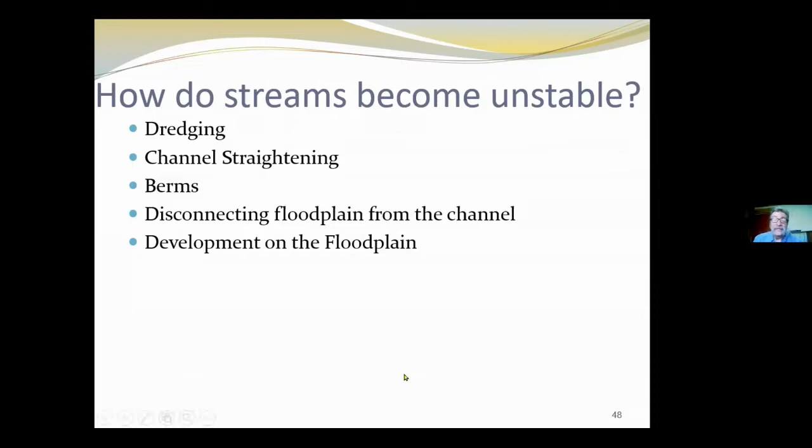So really, how do streams become unstable? A lot of it has to do with our activities. When we respond to excess sediment moving through a system, we may engage in dredging that may or may not leave the stream in better or worse condition, due to some development in the area. We might try to straighten a channel, build berms which disconnect that stream from its floodplains, or any other ways we disconnect floodplains from the channel will have an impact on that stream. Development in that floodplain is just some of the things we want to start to address.

We can't talk about streams and sediment movement without at least touching on dredging. As I mentioned, streams evolve over centuries to reflect the flow patterns in that watershed that Jeff talked about. That typical stable pattern includes a uniform slope, a slope to the stream that develops to reflect its valley and the area it's cutting through.

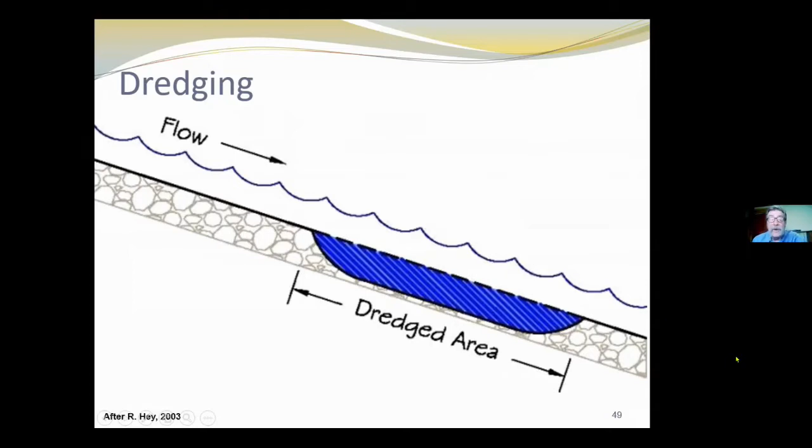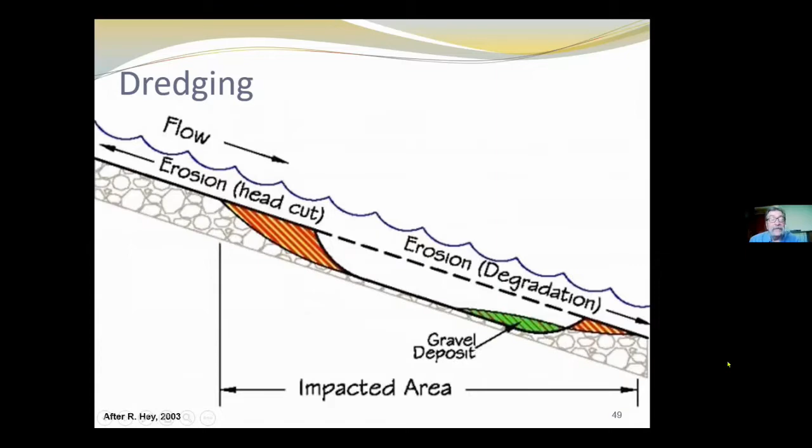So if we come in here and we have excess gravel and we remove gravel below that uniform slope, the stream's going to respond somehow to fill in that hole. What happens is that stream moves upstream and starts to grab bed load. It grabs material from the bed and banks of that stream and attempts to deposit that gravel to fill in that hole, and over time it'll actually return to that uniform slope.

The other thing we can expect to happen is that this material was bed load that was mobile to begin with. So basically, we're putting material that was mobile to start with onto a bank, expecting it to stay there. Then when the next high flow comes along, and that shear stress is even going to be higher than before, it's going to remobilize that material, and we're going to see some consequences as a result.

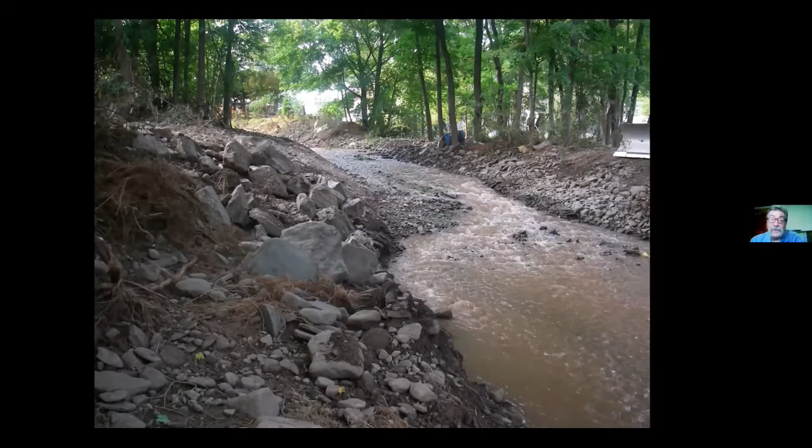Here's an example of an area where, again, they just removed some material from the stream for whatever reason. They piled it up on the banks, again eliminating access to the floodplains. They oversteepened an area, and if you look right here, it's oversteepened, and they flattened it out here. So what's happening? We've got that steep riffle and a channel that's a little bit too wide.

So now we're going to see gravel deposition, even within the short time that this was excavated. And we're starting to see that erosion hitting upstream, where that stream is looking to grab that material, take it out of the channel and the banks, and deposit it to fill the hole we just left in the stream. We need to be aware of that process, because there are unintended consequences to some of our activities, and that's what we're aimed at.

So really, does dredging help flooding? Here's an example where some folks did some engineering, and that purple line is the original bottom of the stream. They theoretically dredged that stream 3 feet deeper to see if they could get more flow through that channel without engaging the floodplain. But when you look at the elevation difference in that floodplain before and after dredging, it's hardly anything at all. So we're really not protecting our floodplains by dredging streams.

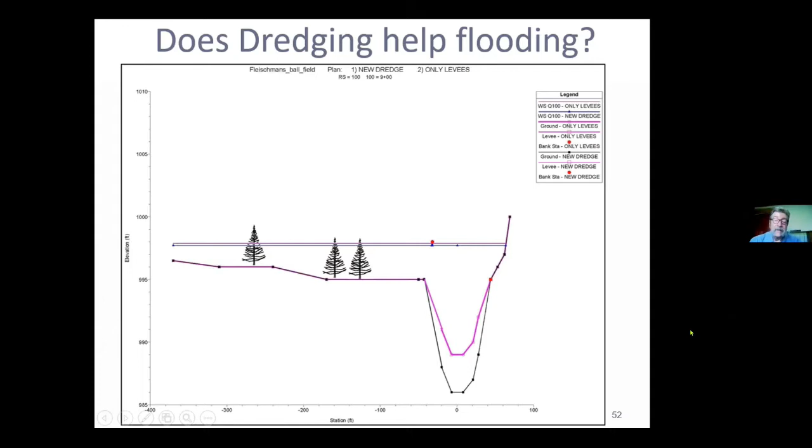So, how would you approach it? Well, here's a typical stream, and we can see here's a bankfull elevation. Let me clarify what we mean by bankfull elevation. Bankfull is that elevation in the water flow in that channel that starts to mobilize the bed load material and starts to create the shape of that stream.

At that point, when we hit that flow at bankfull, the stream starts to evolve, showing features that result from the deposition of material being moved at bankfull. So when we disconnect the stream from bankfull by making it too deep, we eliminate access to floodplains, and floodplains act like a pressure relief valve. When that shear stress gets so high that it starts to rip and tear at the banks and dig up the bed of the stream, it's able to dissipate its energy over a broad area of floodplain. That floodplain is really critical to how that stream remains stable.

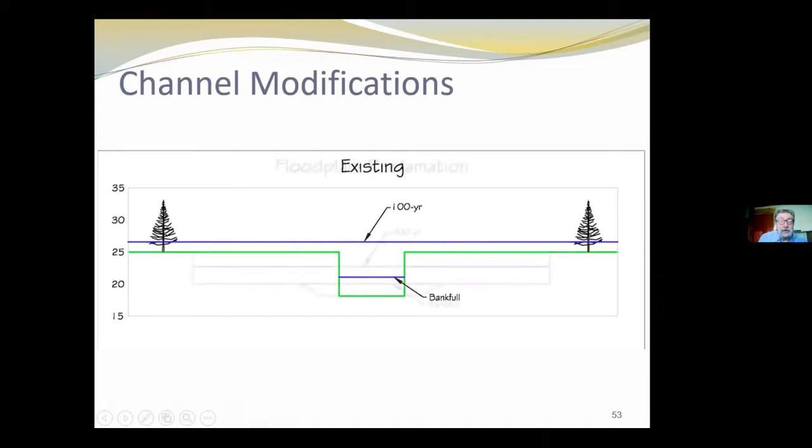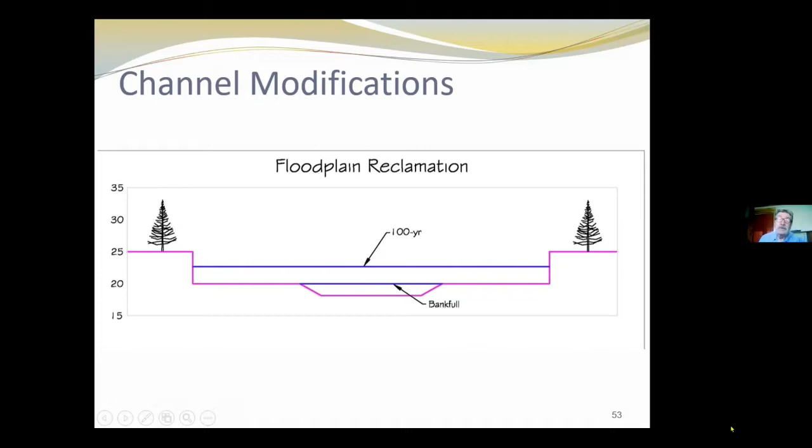So if we go in there and decide we don't want so much flooding, we've got that 100-year floodplain out there, we've got bankfull, and we just dig that stream a little deeper, we didn't really budge that 100-year floodplain at all. Rather, what we're proposing is that if you have a situation where you're disconnected from the floodplain and you have flooding issues, if we were to go in there and create a channel that reflects the bankfull condition, the stable shear stress, and the floodplain that's needed, we recreate that floodplain and can significantly reduce the amount of flooding in developed areas. By recreating that whole stable stream system, we can start to address the long-term stability of a stream channel.

When we go to straighten a channel, think about the slope, the steepness. When you have a long meandering stream channel that goes from point A to point B, you have a long distance for that stream to drop out some of that power, some of that energy, some of that shear stress. If we reduce that distance, we shorten the distance the stream needs to travel, so it picks up energy, and by shortening that distance we also increase the slope. So we have a steeper slope, increased velocity, and as a result, more stream bank and stream bed erosion.

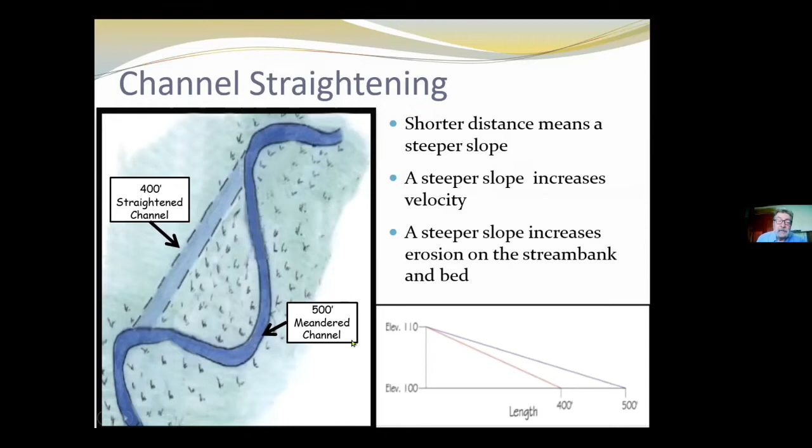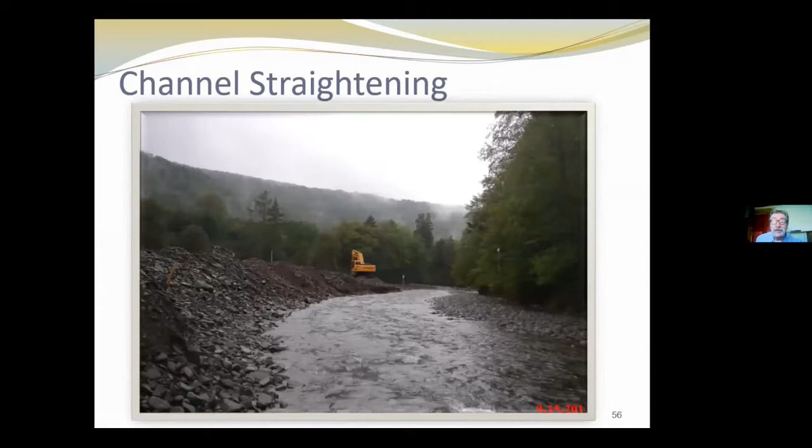Here's a case example where, for whatever reason, over to the left side of the stream looking downstream, we can see there were some impacts—maybe there was a road there or whatever. So folks decided they were going to straighten that stream, and as usual, they dredged it out. They created a berm so that the stream could no longer engage its floodplain. Within a very short time, that stream started to meander back to where it wanted to be, taking that straightness out of the stream. It wanted to return to that stable situation.

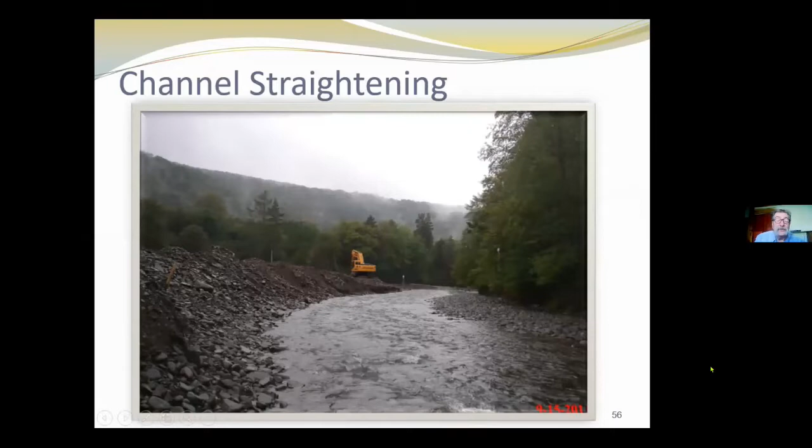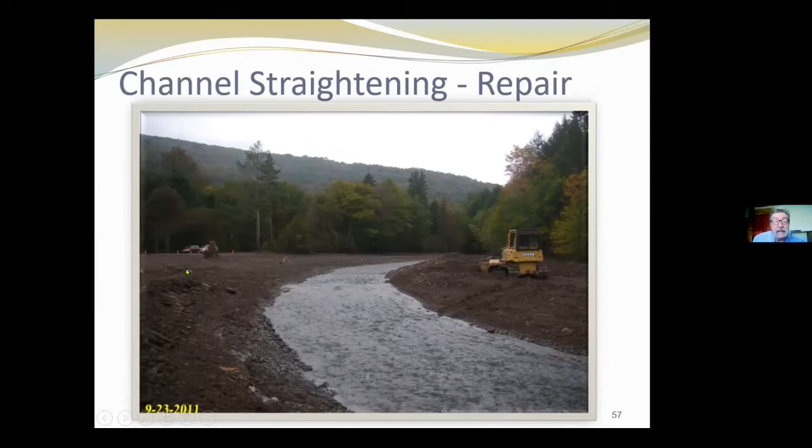So here we see that point bar recreating a small floodplain side of that meander, starting to cut into the berm that they left there. As a result, folks had to go back and do some reconstruction—to put that meander back again, to reduce some of that velocity and energy, and recreate a nice broad point bar that again allowed the stream to deposit material, along with that vast floodplain, so the stream can engage that floodplain and again drop out energy.

So we have a number of videos here that can provide some really dramatic examples, and this one has to do with stream straightening.

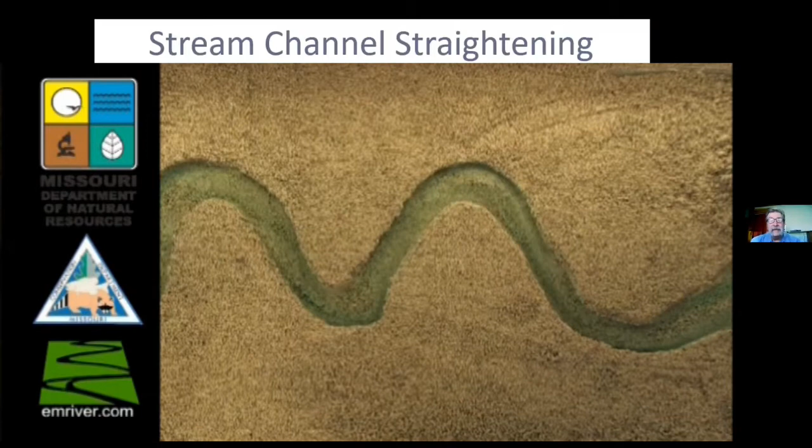So we see here a typical stream with a very natural meandering pattern, a bit of migration through the valley. That was probably a concern to the landowner for whatever reason in our scenario here. The reason these stream table examples are really good is that it's showing water flow as well as bed load movement, and the granular material they utilized on this stream table is good to reflect that.

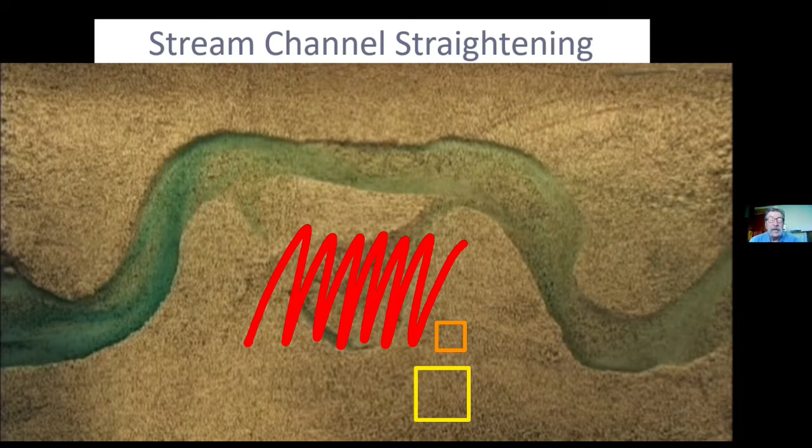So here you see we straightened the stream out, preventing this meander from eating into a field, development, or structure. And right away the stream starts to recreate that stable pattern, because that stable pattern evolved over time in a valley with specific slopes and specific types of materials, and all those things that go into the morphological features that help create a stream.

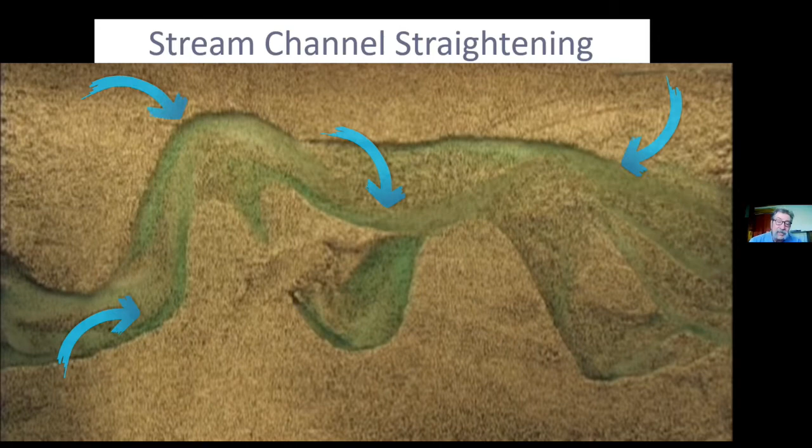So again, you can see that meandering pattern starting to reform, the same pattern we showed at the beginning of the film, and materials being redeposited here. The stream is trying to evolve to that stable situation. In the meantime, it's redepositing material, cutting into banks, seeking to create that morphology.

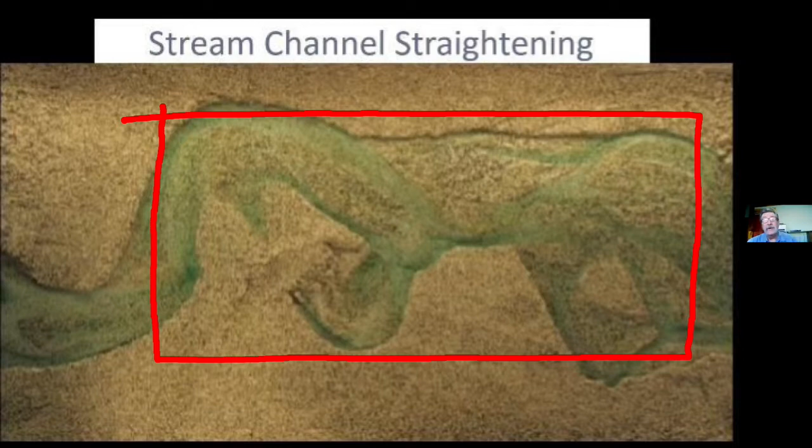And look at all the real estate that's been lost as a result of that. So again, straightening has a lot of consequences that we don't often anticipate.

In this example of dredging, we're now dealing with the consequences of a destabilized stream. We have a lot of sediment deposited right in here. The stream is unstable. If we left it alone for another 10,000 years, it would be fine.

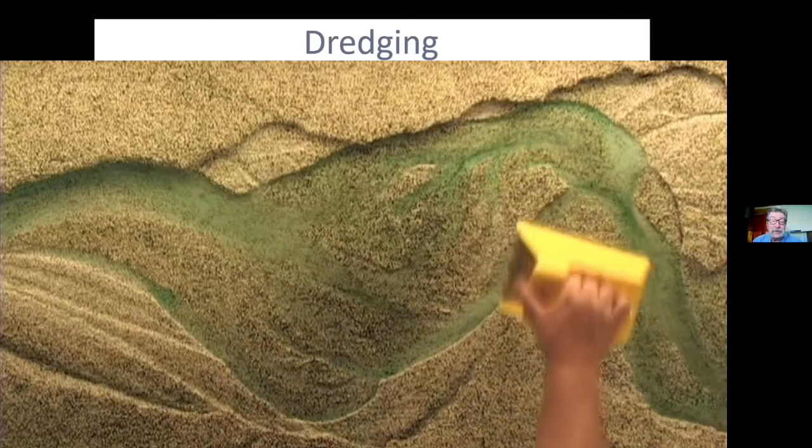But no, we're going to go in there and dredge that material. Now as we dredge, that material is being replaced by wasting banks, by this head cut, where the bed is actually being eroded to fill in that hole that was a result of the dredging.

And again, the stream is trying to get back to that meandering pattern with a nice stable form, width, depth, and access. But now, since we had that head cut grab material to fill in that hole, the stream is being lowered even further from the floodplain.

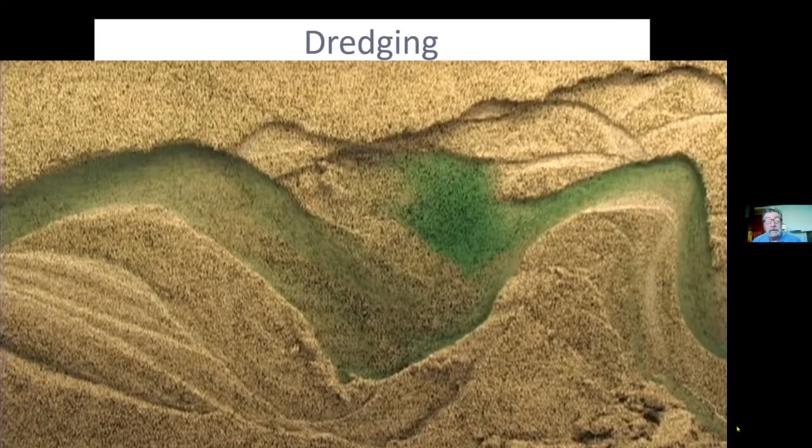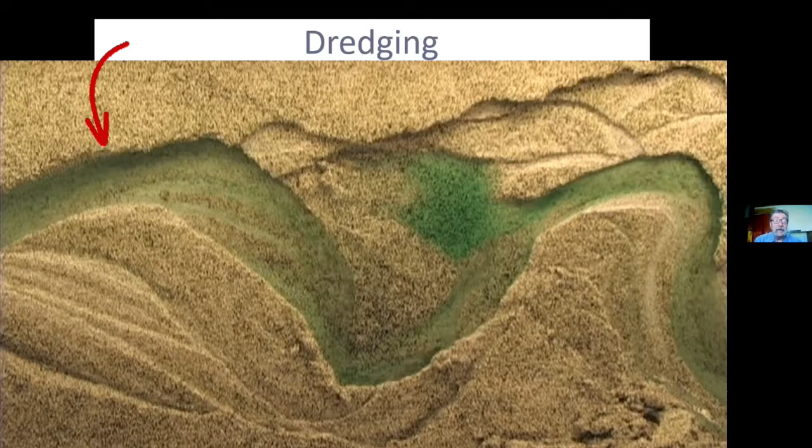It's disconnected from the floodplain, and it's creating more stress on the bank. So we see bank failure up above where we did the dredging operation. Again, we can see the consequences of activities that aren't done in a way that reflects what that stream is looking for.

And again, we can see it's struggling to get back to that pattern, and it'll do this through a lot of different storms. It may happen in a few years, it may happen in one year, depending on precipitation rates. But again, look at the results of that.

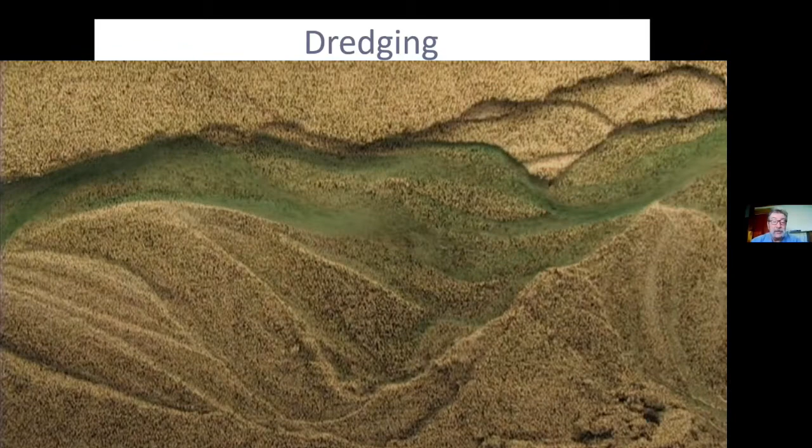Now we have another example where we have deposition from whatever reason that's starting to create an unstable pattern in here, so we're going to dredge to take the pressure away from this house. Look at the head cut. Again, we have a hole in the stream bed filling in as a result of the stream trying to get back to a stable situation.

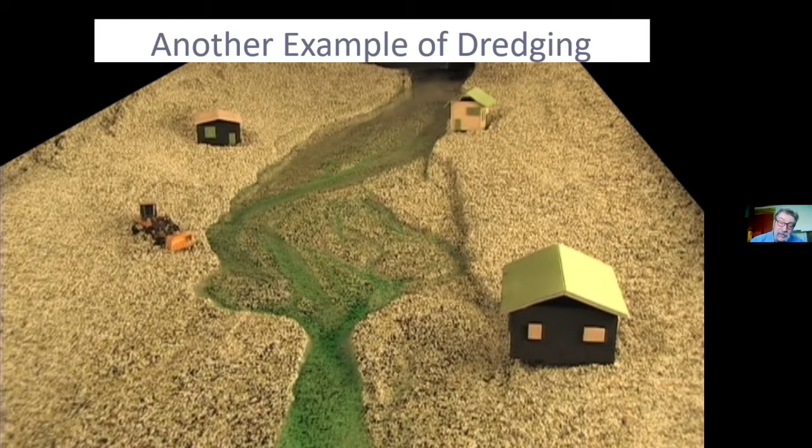It's grabbing material from the bed and banks to fill in that hole. But guess what? In the time it took to start restabilizing a pattern, it's now eroding over on this side of the bank. So again, we're going to have to go in there and remove that deposition.

And we do that again, create a hole, and watch that head cut move upstream. Again, it's grabbing material from the bed to fill that hole. And now this house, which probably had no problems for the last 50 years, is now ready to fall into the stream because of activity done a quarter mile downstream to address a problem there, and they addressed it improperly.

And again, as we watch this video run through, that stream's grabbing material to fill in the hole and the disturbance that we created. And then upstream, we're seeing the consequences.

And boy, I hate to say, but I've seen this happen many, many times in life.

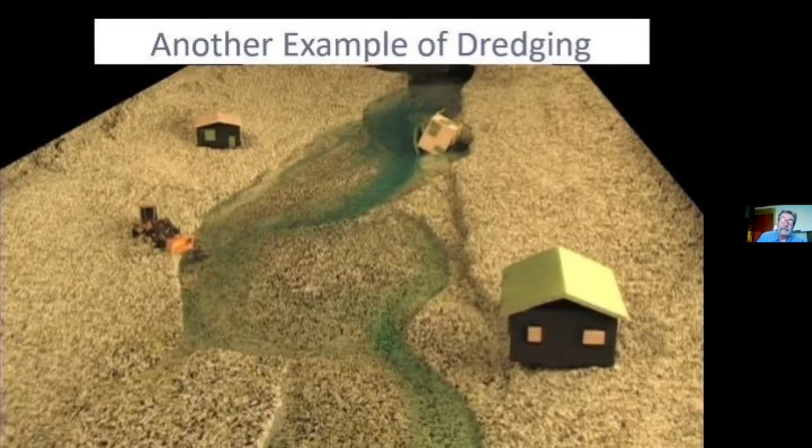Okay, next we would like to talk a little bit about berms. If you remember, we talked about the importance of floodplains, and the critical roles they play. Floodplains actually are a pressure relief valve. When water starts to build up and the shear stress in that channel starts to increase, floodplains are nature's way of relieving that pressure. They flatten out, spread over the vast floodplain, and dissipate all that energy in the stream channel.

When we start to channelize and put in berms, we're actually disconnecting the floodplains from the channel itself. The result is that floodwaters increase in depth. And as they increase in depth, they also increase in shear stress, and the amount of material eroded from the bed and banks.

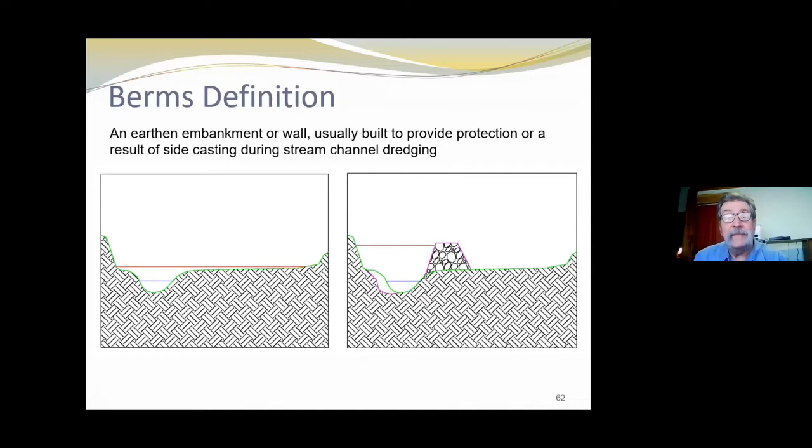Here's an example where the floodplain is engaged and dissipating the energy in those floodwaters. Here we've stacked those floodwaters up, so it's going to increase shear stress and remove material from the banks, causing bank erosion. That debris and bed load is going to wind up downstream somewhere and create new problems.

So when that culvert is full of water, the velocity starts to decrease and we get deposition—a lot of that bed load dropping out upstream of the culvert—and as a result we eventually lose capacity in the culvert from what we had.

One of the things commonly done to maintain those crossings is folks go in and remove some of that bed load, and we all know how expensive it is to truck material. So a lot of times it's placed right along the banks. Well, that does a number of things. There are also folks, especially in agricultural operations, that don't really want those floodwaters across their crop fields.

You have woody debris that drops out, and sometimes real erosion that happens through those fields. And if you have a crop in there, those floodwaters aren't the best for those crops.

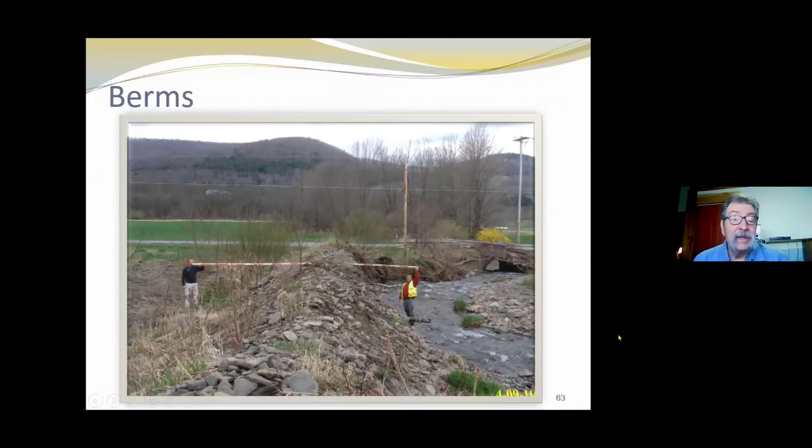Here's an example of an agricultural operation. We've got the stream over here to our left, and you can see it's almost the elevation of that field. So that field was functioning as a floodplain, again, to relieve the pressure of that flow during storm events.

Well, the farmer didn't want that water out on his field. So he spent a lot of time bringing in material, stacking it, grading it off, vegetating it—a lot of time and energy. And what happened? That flow came along and breached that berm, because it wasn't engineered with material resistant to that stress and energy in the stream. It breached the berm and entered the field as a concentrated flow.

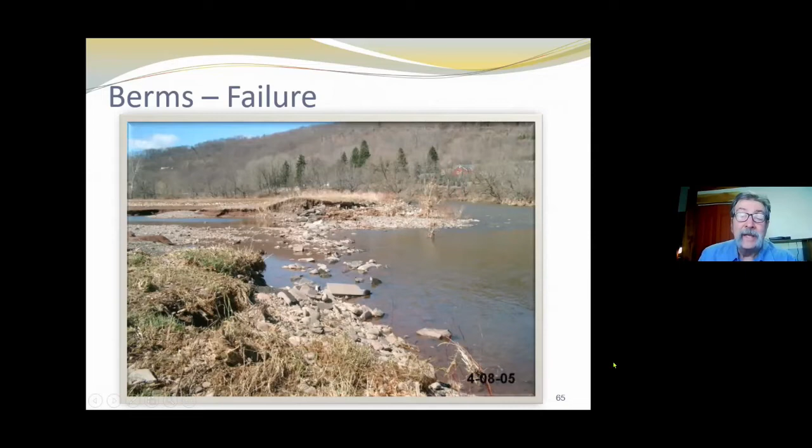Whenever we think about a berm, that berm will fail. It'll start to head cut through that berm and fail on the downhill side and work its way back. So now we have concentrated flow back into that field, and the damage that was done there is not something that would happen from a little bit of sediment or some woody debris. Now we have concentrated flow that got trapped behind that berm and cut through that field, so we have some significant damage.

One of the things we commonly run into is that if this berm exists along the whole edge of this field, we might have a situation where this flow enters the field, gets trapped behind the berm, and goes down slope through that valley and outlets further down. And if there are any structures in the way, such as homes or barns, it's now refocusing those flows towards that structure.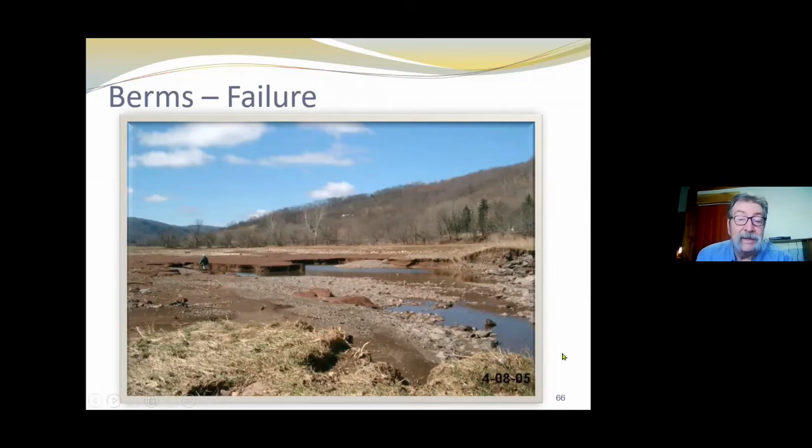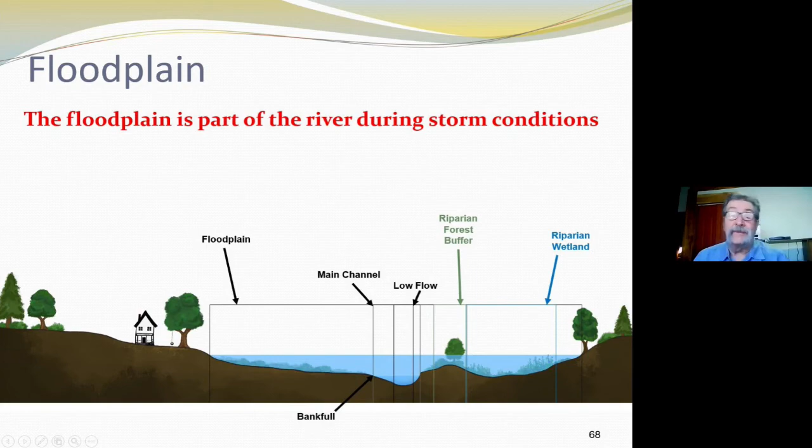We come in and say, well, this hasn't flooded in 25 years, so let's fill that in and do some kind of development there. It doesn't take a rocket scientist to figure out that when that floodwater comes again, we're now forcing that water over into areas it didn't traditionally flow in. That might include roadways, homes, or all kinds of different infrastructure. So again, we need to be aware of the long-term consequences of our actions.

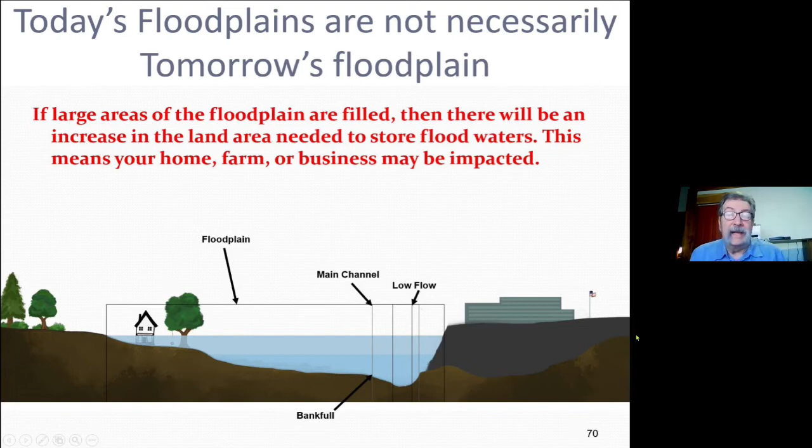The other thing that happens is when a channel is disconnected from its floodplain, the velocity and energy in the stream increases because we've stacked the water up and concentrated it. I often use the example of a garden hose: you have a half-inch garden hose and turn the water on full blast, and it flows out a foot or two from the nozzle - you can actually dig a hole or move material with that nozzle. Put that same flow through a 4-inch drain tile and it just about dribbles out the end. So when you start to play with the configuration of a stream channel - the width, the depth, how wide that floodplain is - you start to play with the energy.

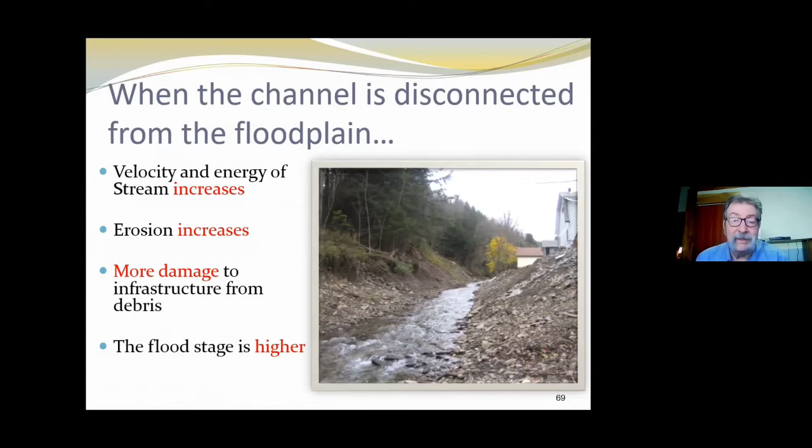So again, you disconnect the floodplain, you increase the energy from the stream, erosion increases as a result, and you have damage from that erosion. The flood stage is higher, and all that material that's being mobilized and redistributed goes downstream, and it's probably going to wind up in front of that culvert or stream crossing we just saw a picture of.

Same example here: for whatever reason, we had some erosion along the road here. So folks, instead of just filling in the road width, decided to get a little bit more rambunctious. What's going to happen to the left side of this stream? Now we've concentrated it, kind of like that mass wasting Jeff talked about, where it comes down the hillside and restricts the stream channel, and that stream channel is going to actually increase in velocity.

It's got less space. It's like taking that 4-inch drain tile flow and putting it into a half-inch garden hose - now we've got a lot more force. It's going to go through that section, and it's going to rip and tear a little bit more. And if it doesn't rip and tear in places that we want it to, it could be doing significant damage on the other side of that creek.

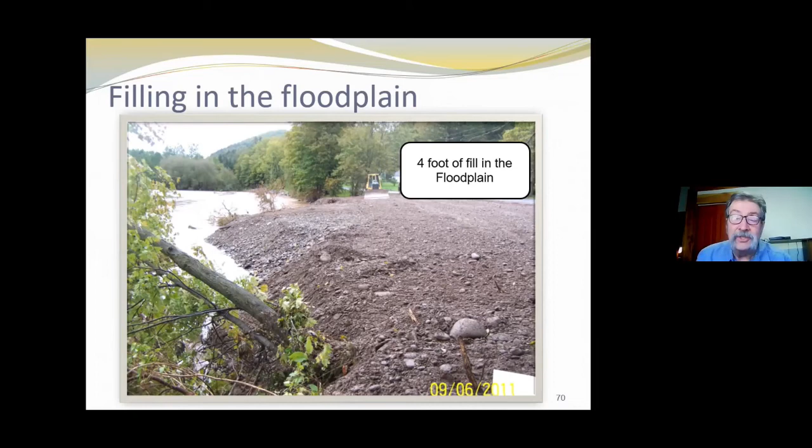So if we develop on a floodplain, with buildings, bridge approaches, which we commonly do in some of these valleys, with roads, with parking lots—here's an example, Margaretville in Delaware County along the East Branch of the Delaware River. Make a note of how this is laid out, because I'm going to show some slides right after this that show some damage done as a result of the storm.

We have the shopping center that's laid out, but we have a nice broad recreational area here, a field, and that's a really good use for a floodplain. Agricultural, recreational uses, all those different things that don't adjust that elevation in that floodplain are really good uses. But again, we have this open floodplain in here.

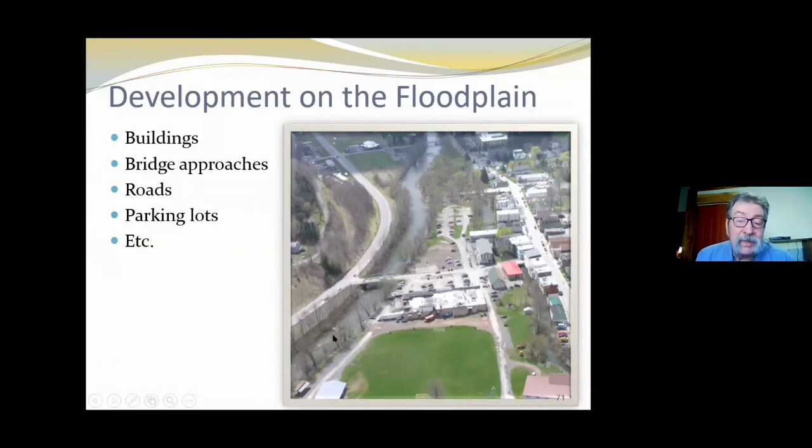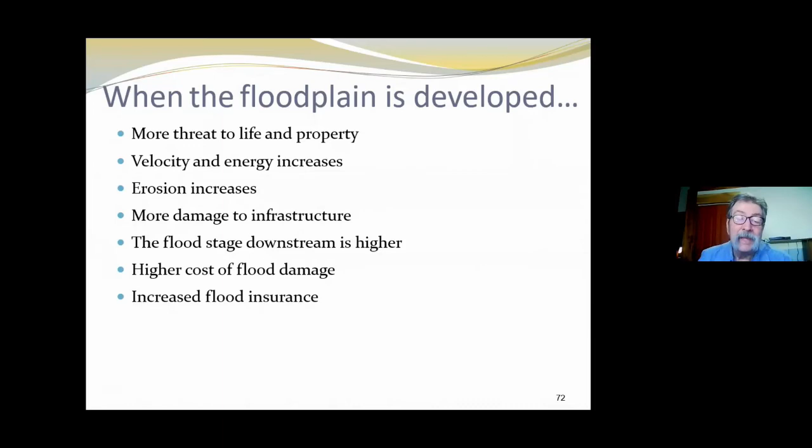We have now some obstructions or developments in floodplains. When you have that kind of development, you're actually putting all of those structures in jeopardy, so there's more threat to life and property. As I've mentioned, those velocities increase, the energy increases, erosion increases, and anything in the way is liable to be damaged, and that infrastructure is in jeopardy. The flood stage downstream is also going to be higher, because you've built that water elevation up, so you have costs, increased flood insurance, and even jeopardy to human life.

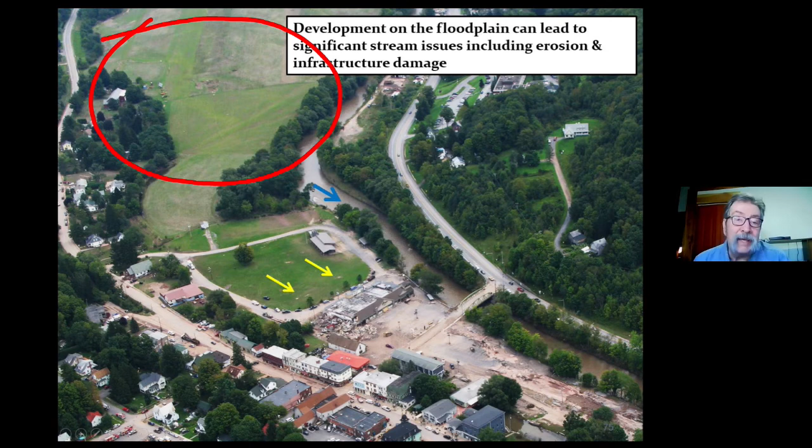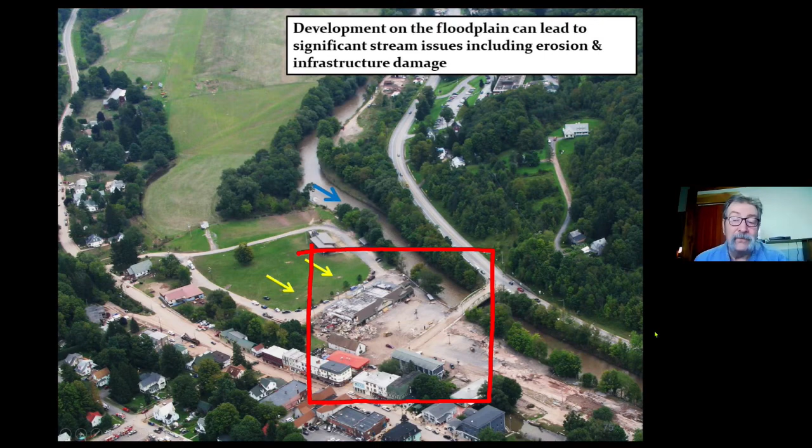So here's again that same area that has gone through a significant storm. You look upstream, you have these broad floodplains that were able to engage that water, and here's that recreational area, and here's the development that we had in the floodplain, and here's some close-up pictures of that storm as it was occurring, ripping and tearing through that infrastructure.

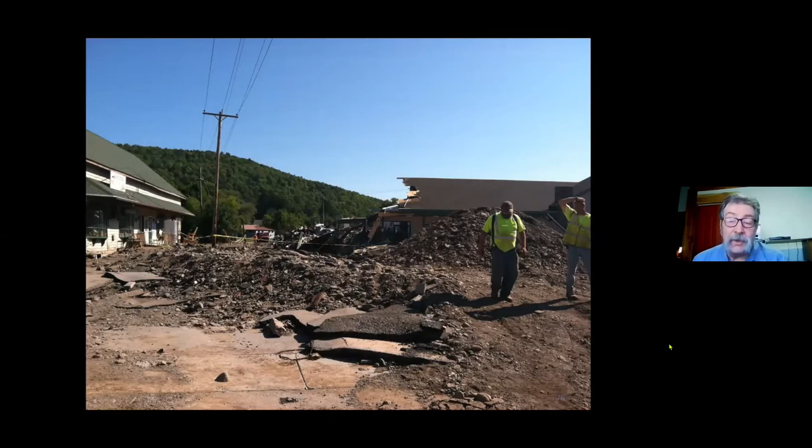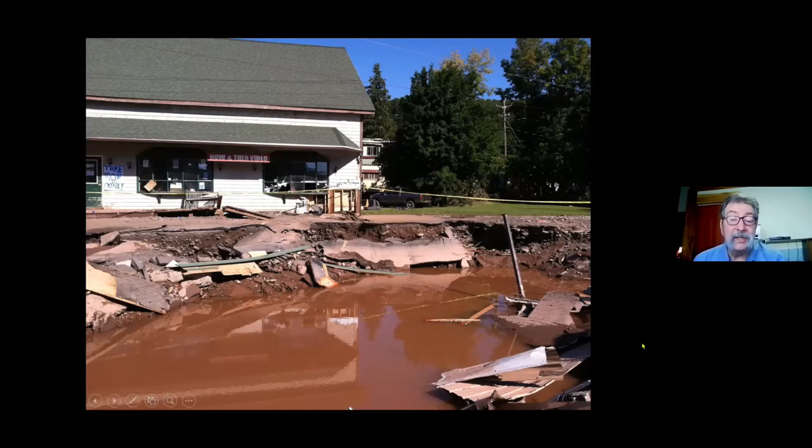Pretty scary stuff. When you look at the damage post-flood, you can see whole buildings were ripped away. Asphalt was ripped up. When you look at the concrete and the asphalt, you actually got holes scoured right through what you would think is very resistant material—concrete. Really impressive force that went through there.

But look at that park. Now I'm standing, taking this picture with my back almost against those buildings that were devastated. But here is that recreational area of that floodplain—that water didn't even pull up the grass blades. So in the previous pictures we saw the concrete and asphalt ripped and torn, but when we look at a floodplain that's adequately sized, that's broad, that dissipates that energy, we don't even see the grass mobilized.

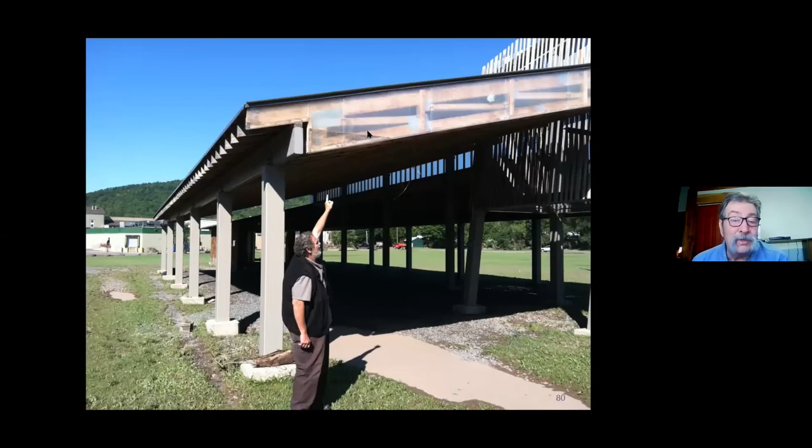And here's the elevations—there's the floodplain elevation right up here that's being pointed to. That's how high those floodwaters got. But we had a gazebo here that was built to allow those flood flows to go through that area. We have grassed areas that didn't exhibit any kind of erosion at all. And here's those buildings that were devastated back in the foreground. Again, a very impressive example of what those floodwaters do and how functional those floodplains are in handling those energies.

Jeff, you got anything to add to that, or?

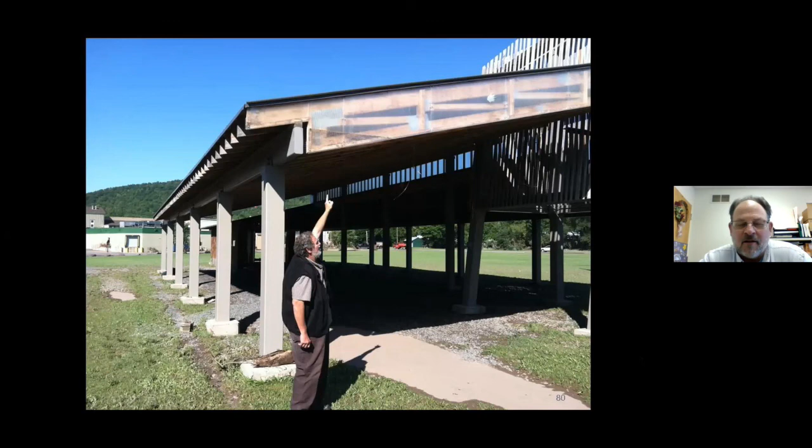No, those slides certainly show the definite benefits of having floodplains. And I'm going through one today, believe it or not. We got a snow melt occurring, and I got a guy who lives in a 100-year floodplain, and his backyard has water in it, and they let him build a garage back there. And well, guess what? His garage floor is starting to get a little damp simply because they built it in that floodplain. So it's an obstruction there.

Very, very important. For some reason, that's the hardest thing for landowners to understand—the importance of floodplains and the benefits to having them, for sure.

I always like to tell a little story about one of the directors on my board who used to farm the floodplains along the Susquehanna River. All his neighbors grew continuous corn on those floodplains, and he grew forage. Whenever the spring floods came, all his neighbors would complain that they had lost 1 or 2 inches of topsoil, and he would chuckle to himself and say that he had gained 1 or 2 inches of topsoil on that forage. So how we manage those floodplains, how we provide cover on them, is pretty critical to everyone.